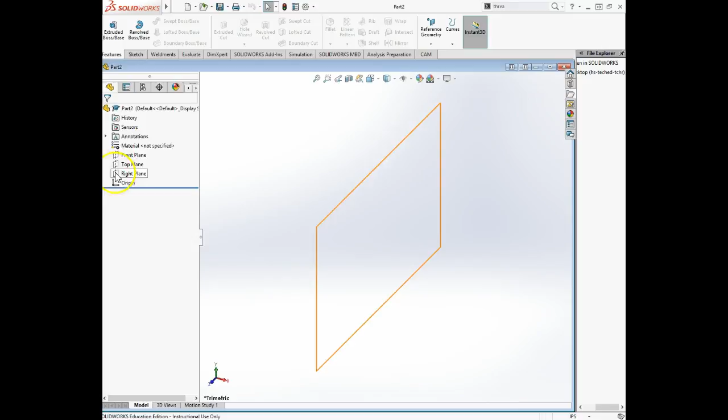We're going to start right here on the top plane. Create a sketch, draw a circle, make sure that I'm selecting the origin, gesture for my dimension tool, and make it a 1/4 inch diameter. Going to finish that sketch and go to extruded boss, and we're going to send it out 3 inches.

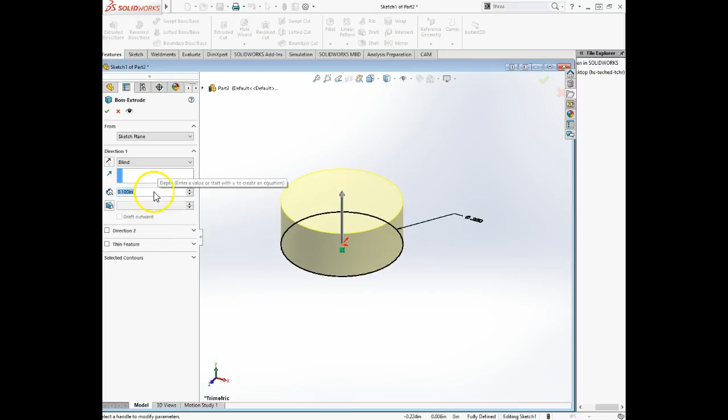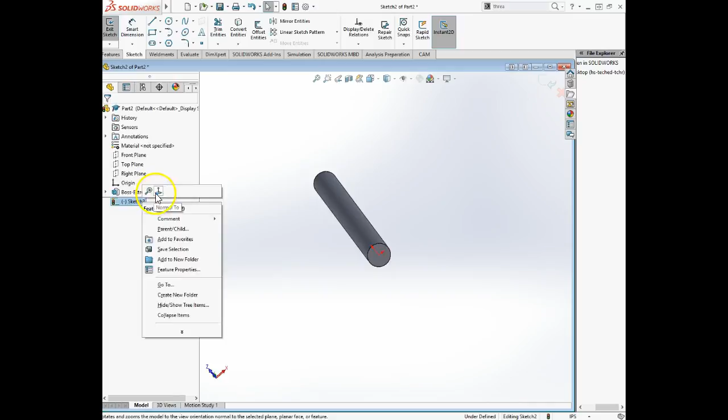I'm going to select the end of our bolt here and make a new sketch, and we're going to grab the polygon tool. Before I do that, I'd like to look normal to my sketch. Grab my polygon tool, make sure I select my origin, and come on out. Going to gesture for my smart dimensions. Oops, thought I did — try that again.

We're going to go from flat to flat on this, and 1/4 inch bolts have a hex size of 7/16.

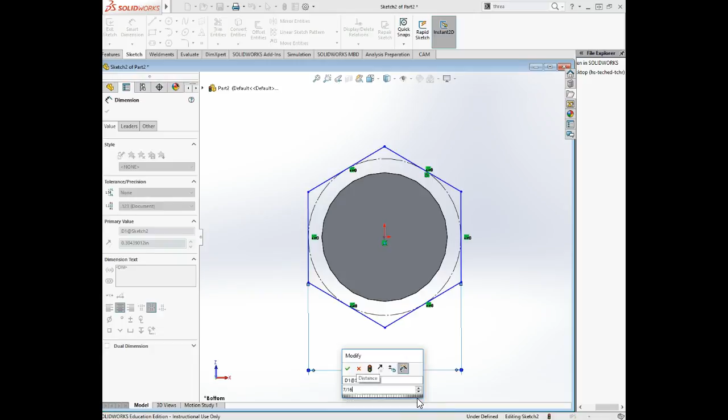Now I want to make sure that my hex is aligned with one of my planes, so I'm going to escape out of the dimension tool, and I want to select this line and make it vertical. You're going to notice it's going to rotate my whole hex. Now that's straight up and down.

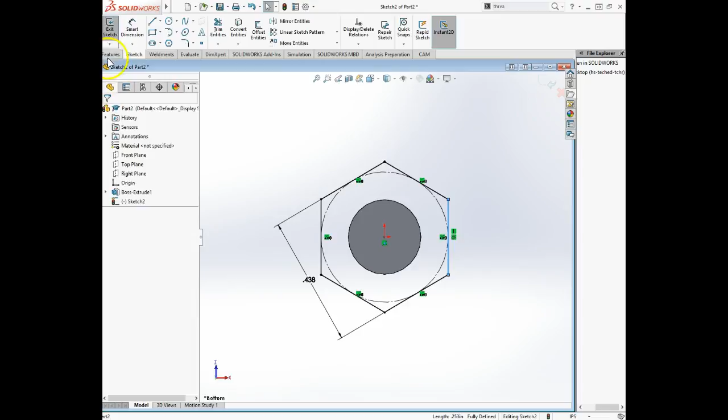That ensures that this is lined up with one of my planes. Okay, I'm going to exit this, and we're going to do an extruded boss.

We want to make sure we're going in the opposite direction of my bolt. I don't want to cover up my bolt, and I want to make sure my bolt stays 3 inches long. And we're going to go to a dimension of — I'm just double checking this — looks like it's 0.165.

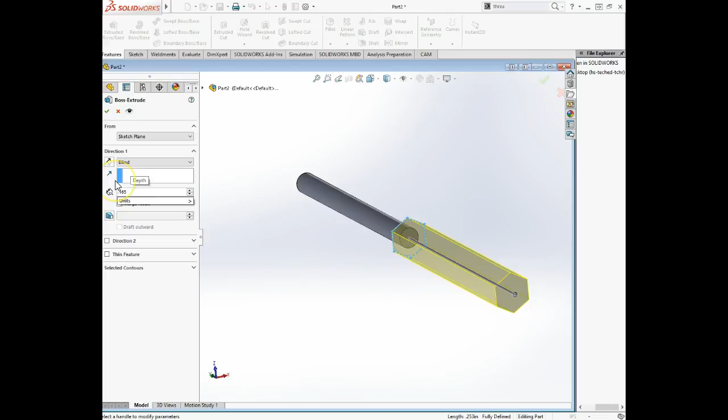If you buy a bolt, the edges are usually eased, so we're going to draw a sketch that allows us to ease those edges. If you remember from chapter 9, you drew that nut and he had you do a swept cut to ease the edges, so we're going to do that.

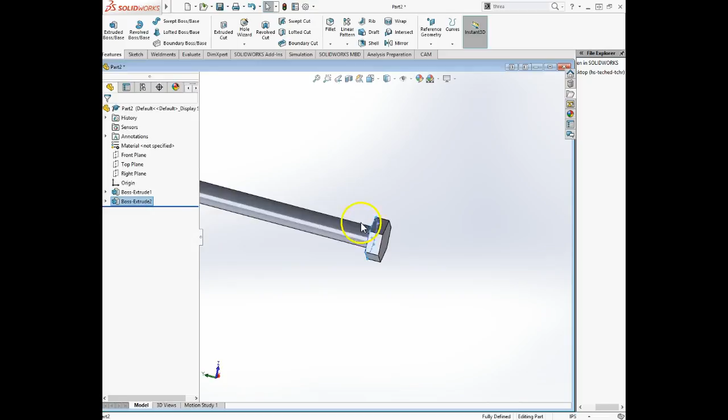Key is making sure that we select the right plane. So if I hover here, notice that my right plane now passes right through the points of my hex, which is the reason why I aligned it vertical to that, so that I could have that right plane pass through. So while my right plane is selected, I'm going to go ahead and create a new sketch.

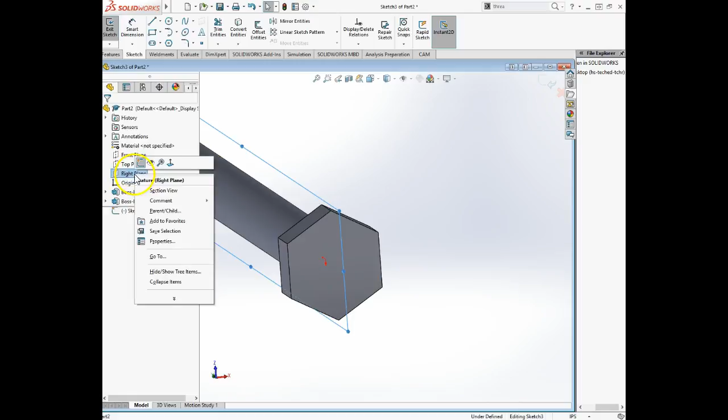I'm going to look normal to that sketch, and I'm going to change my view to be hidden lines removed. Okay, so we're going to draw a couple of arcs here and then mirror them and cut them. The first thing I'm going to do though is create my axis of rotation.

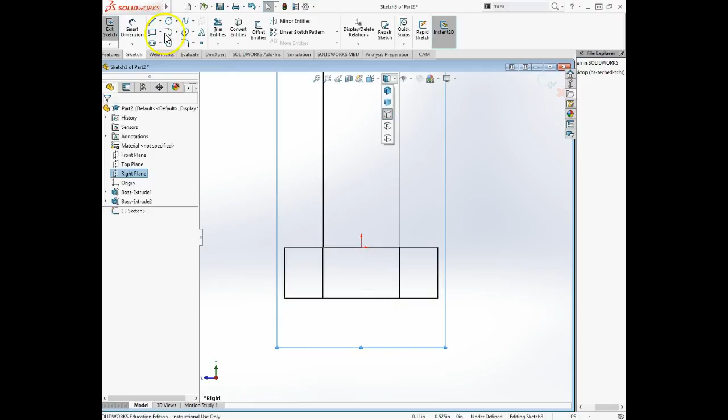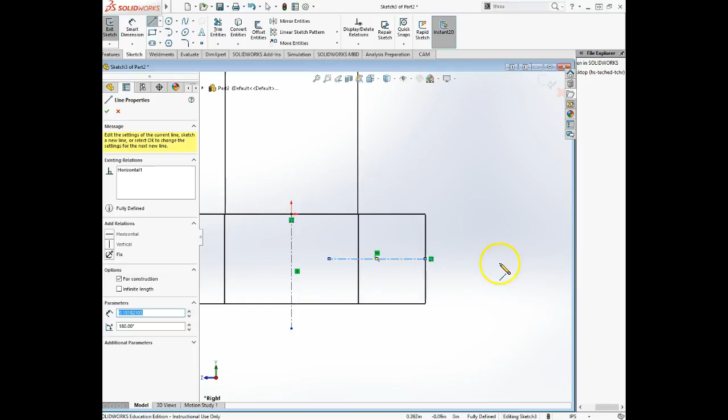So I'm going to go under my line tool and create an axis of rotation here. I'm also going to create a mirror line by hovering over this segment, and notice that when I get to the middle I get a dot here. This is going to be for mirroring my sketch on this side. So I've got my revolve line and my mirror line set.

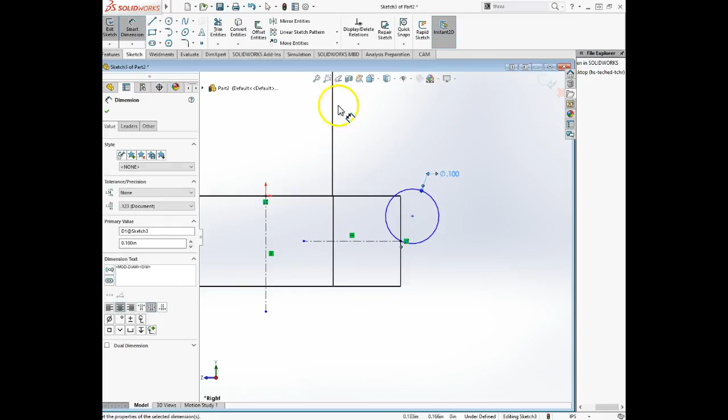Next I want to draw a circle, and I'm just going to draw that circle out here somewhere and gesture for my dimension tool. The diameter of this circle wants to be 0.1. And I'm going to make the distance from the origin to the center 0.21.

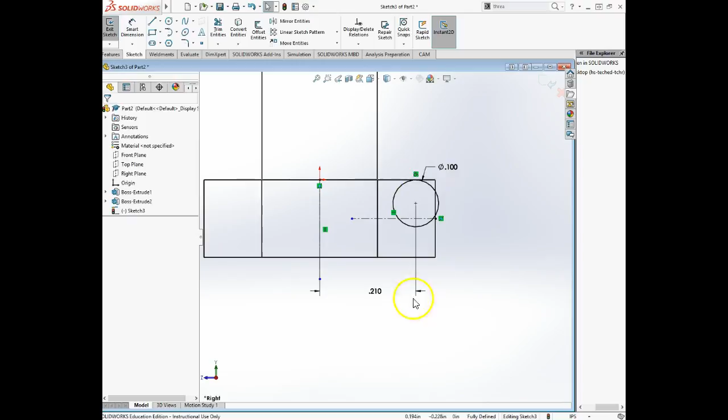Next we're going to add a relationship between this edge and this circle, and I'd like those to be tangent. And we're going to come in and draw a couple of lines and then trim this out. So I'm going to draw a line that's going to go from the corner to my circle, and another line from the corner back to my circle again.

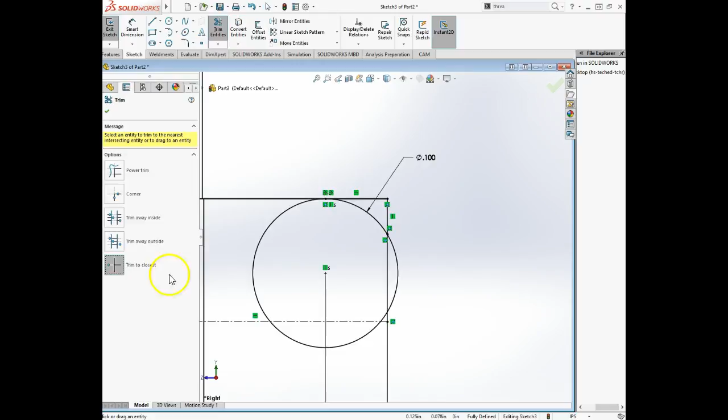Should be able to grab the trim command and trim to closest, so we can get rid of these segments here. I think that's a good shape—it looks like it's black, it's happy, it's fully defined.

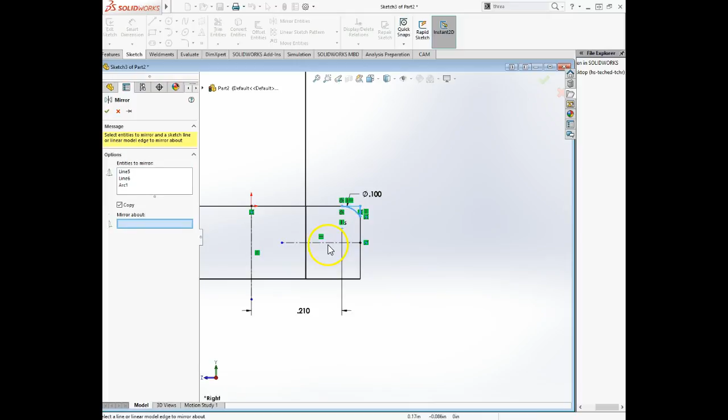Next I'm going to go over to my mirror command, right here as well. For entities to mirror, I'm going to make a box around that shape I just drew, mirror about this line that we drew previously, and I have that set. Now I'm going to exit my sketch.

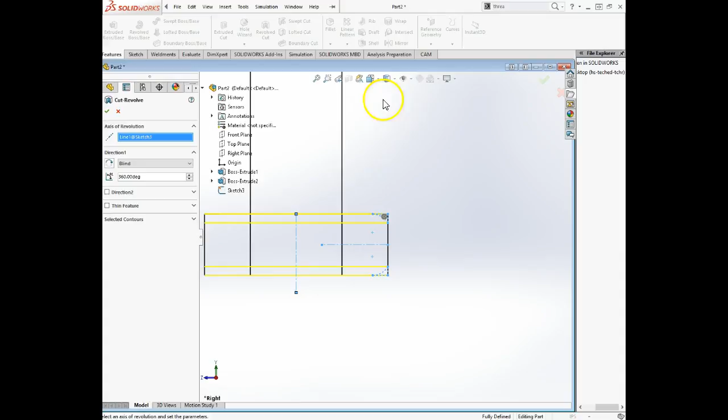I'm going to go to features and go to revolve cut. I'm going to select the axis of rotation as this, and I've got my sketch selected. I'm going to switch my view to solid here, take a peek at that, and hit OK. It looks like it's going to do what I want, and there it is.

So we've eased the edge of our bolt, taken the sharp edges off. Next we just need to put the threads on here.

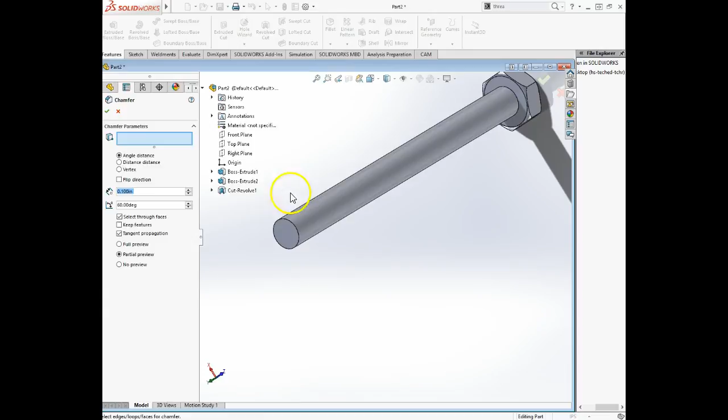Before I put the threads on, I'm going to add a little chamfer on the end of this. I'm going to go grab, under the fillet command we can add a chamfer. Okay, so put a chamfer on this edge. I'm going to set it to 0.0—make sure you have the 0 in there—20 and 60 degrees.

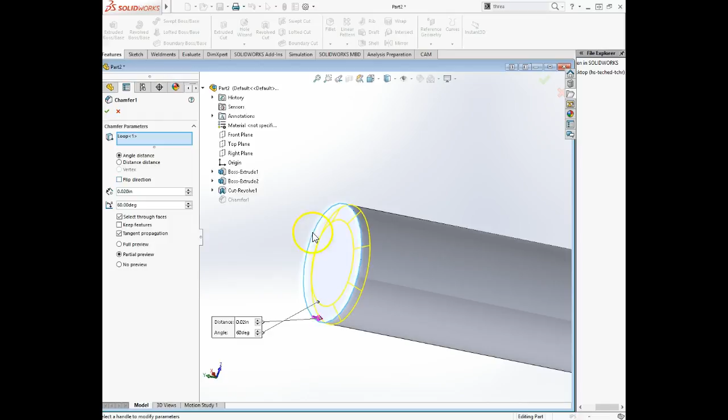And that looks correct. Before I move on though, I'm just going to go back and edit that feature. Please note that you can switch these directions so that the angle and the distance are opposite. I had mine set up so that the angle was 60 degrees here.

Also note that if I accidentally forgot my 0 and put 0.2 in here, it's not going to let me do it because it's asking for something it can't create. So you need to make sure that you put your 0 in there, and it'll give you the correct chamfer you're looking for.

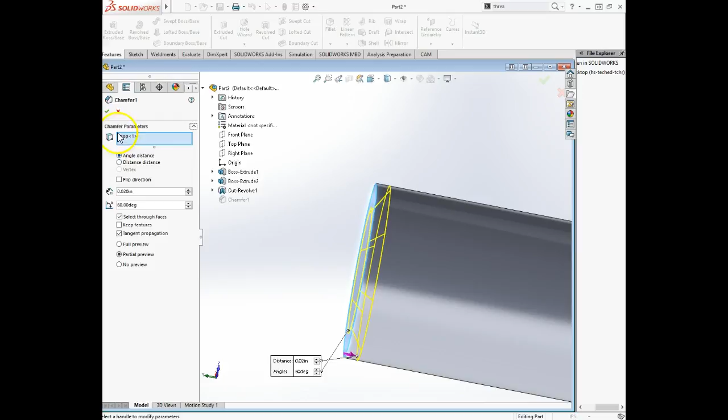Next we're going to add the new thread command. So the author has shown us a couple ways to put threads by cutting them. We're going to use the thread option that's new to SolidWorks.

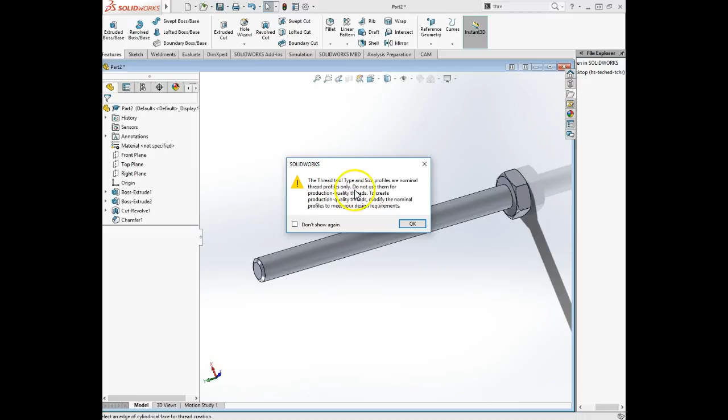If you search commands and hit thread, notice there's a disclaimer here. It says the thread tool creates nominal thread profiles—don't use them for production quality threads. Okay, we won't do that.

The first thing we want to do is make sure that we have the die option selected versus tapping a hole, where a die is going to put threads on the outside of a cylinder, and a tap is going to put threads on the inside of a hole.

The type of threads we're looking for in this particular case are 1/4. There's quite a few options here—we're going to go down to 1/4, which is 0.25, and the 20 is the number of threads per inch. I'm going to select that.

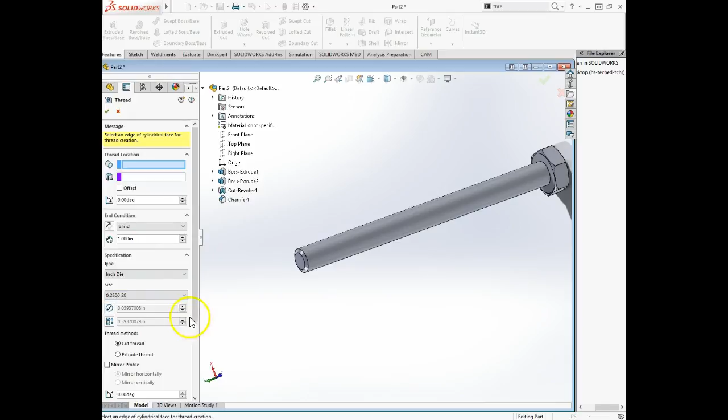For thread location, first I'm going to pick this corner, and then I'm actually going to change that and select this face, which is going to shift it down. Then I'm going to select the offset option, which is going to bring it out a little further. Now it offset it to the wrong side, so if I flip this, notice that it offsets it to the outside, which is what I'm looking for.

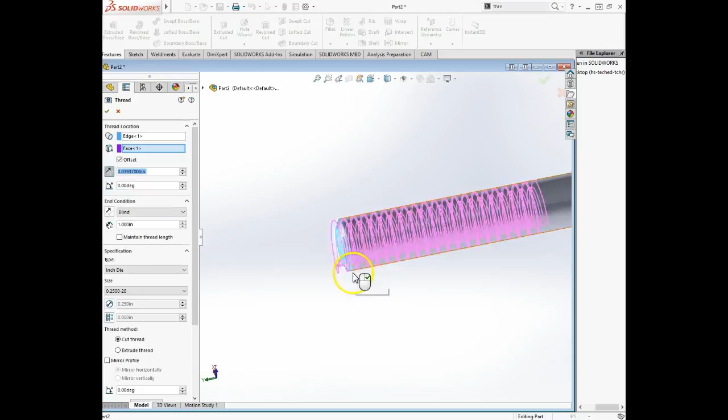Finally, I want to go down here and make sure that my thread is 1 inch long, and I'm going to hit OK. Notice that the chamfer makes it a little easier on the way in, and that sums up creating a bolt using SolidWorks' new thread command.